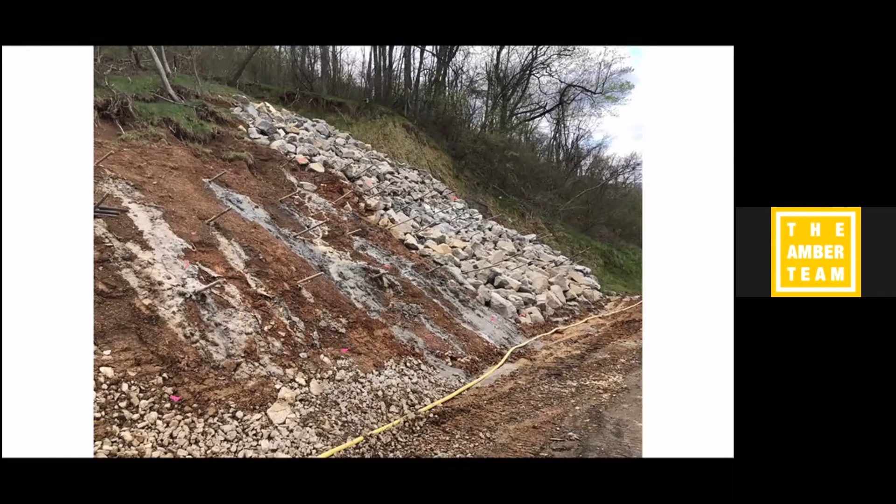All right, so we here at Amber Book, we work in a place that's pretty remote, but at least those who are not remote. Tyler works from Raleigh, which is obviously not remote, but Amber Book World headquarters is in the tiny town, little hamlet of Blacksburg, Virginia. And what we lack in great restaurants or direct flights, we certainly make up for in scenic beauty.

So as a group, we go every once in a while. In fact, we just went today on a hike or a run. About 2 weeks ago, we were going for a run, and you can see what's happening here, right? Or maybe you can't. What the hell is happening here?

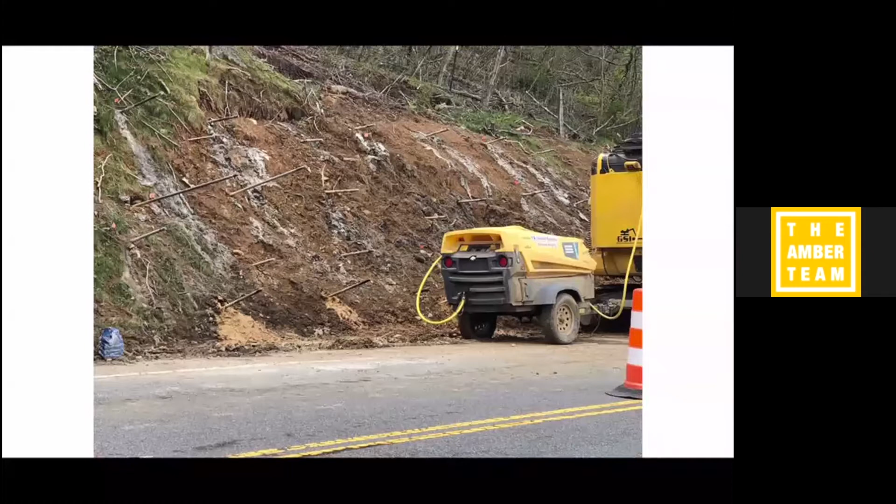What are all these sticks coming out of the ground? They're kind of like metal sticks, and there's this gray drool coming down. And here it is from the other side. Again, you see the metal sticks and the gray drool, and then there's some equipment maybe putting more sticks in the ground. You see them here, and you see them here.

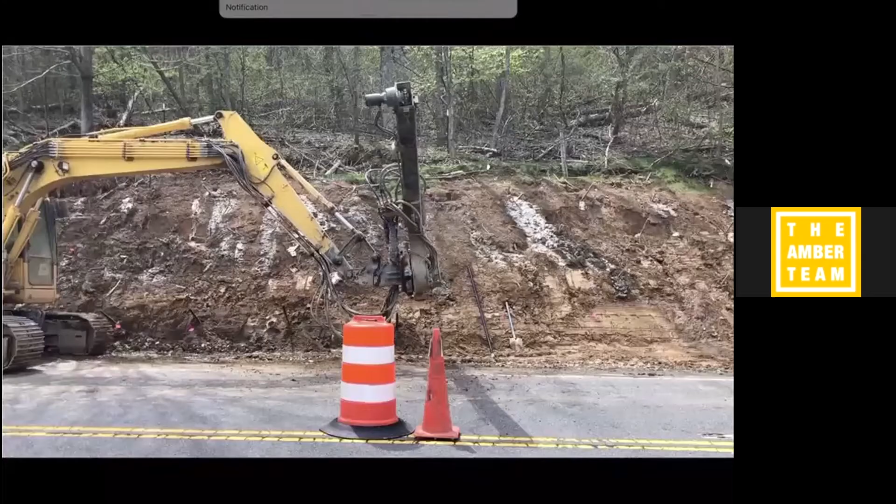So the question is, what's going on? What's going on is this is a big project to limit the amount of erosion that's happening on this hillside that's adjacent to the road.

So I did what I always do, which is just go park the car and get out and start videotaping or photographing workmen at construction sites, which they don't always love, but they almost always love, actually. I found it a truism that people love to talk about their work.

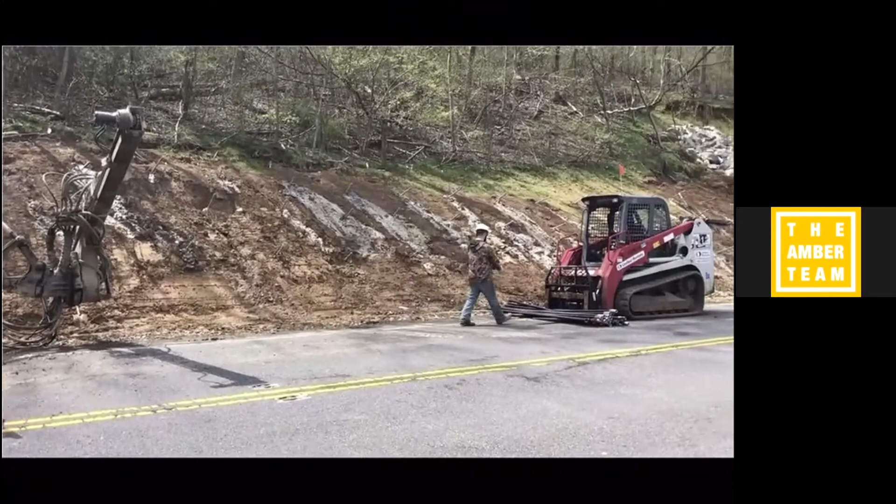No, that's not true. Most people love to talk about their work, and I find it eternally fascinating that there's someone who does this or anything for a living. I can't believe people do stuff for a living. It's amazing. And so you see right there, he's got this right here.

He's got this kind of 4-inch drill bit on a 1.5 inch hollow pipe. So he's sticking it in this machinery. And what it's going to do is kind of pound it into the ground as it spins it. So it's going to drill it into the ground. So it's a hollow pipe.

So if this is the bank of the hill, it's a hollow pipe, and they're going to drill it down. It's hollow, and then it's got an oversized bit on the front of it. So they're going to open up a hole that's meaningfully bigger than the 1.5 inch pipe. The pipe is about the size of a railing, the diameter of a railing.

And you see right here, it's driving it into the ground. You can see right here, it's kind of pushing it into the ground. I had to butter them up for a little bit first before I got permission to cross the street and go kind of behind their cones. You'll see that in a minute. You won't see me buttering them up, but you'll see this from the other angle.

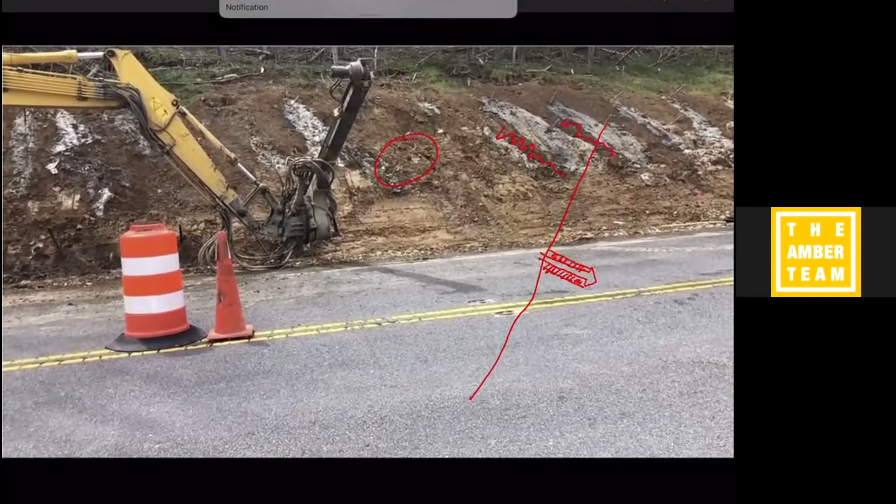So what you're going to see in a second is this is going to kind of pull back up. This little device is going to reverse it. And when it reverses it, it's going to pull some of the soil out. But it won't, importantly, be pulling the soil that's inside the hollow pipe, just the soil that's in the hole around the hollow pipe. We'll talk about that in a minute also.

And then it's going to go back down again. So it's pulling the soil out, just like when you sometimes drill, you'll pull the drill bit out and the sawdust will come out. Now, that was just one maybe 6 or 8 foot long pipe. But you're going to see in a second, he's going to add a second pipe. And I'm not going to show you the whole video, but he adds a third and a fourth and a fifth and so forth. So it's going in and out, in and out.

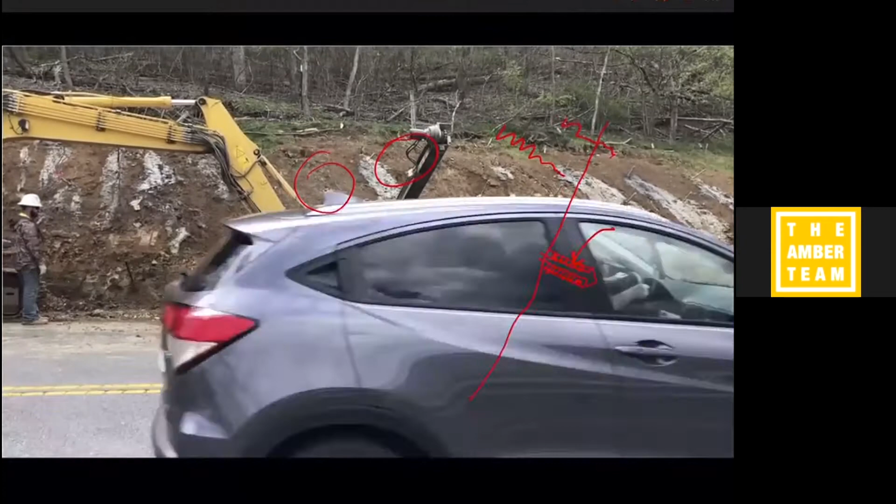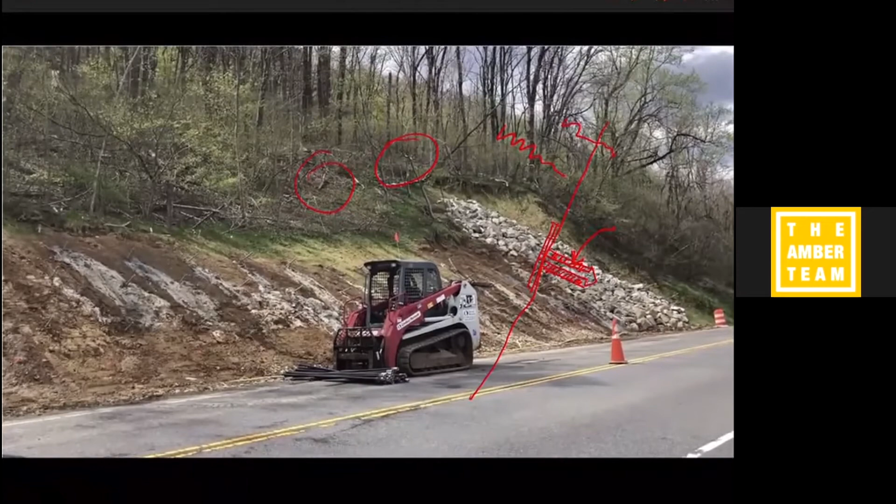And someone asked, is this similar to a tieback? And the answer is hell yeah, it's exactly similar to a tieback. We're going to see a tieback example in a little bit, but in the case of a tieback, we're going to attach it to some kind of a piece of wood or metal that's going to hold the earth back, often as part of construction for a retaining wall, but also construction for a temporary way to hold back the earth when you're digging a foundation.

Let's take a look at one of the others. All right, what's happening here? This is so cool. What the hell is happening here? Well, to the left, do you see all that dust come out? You'll see it again in a little bit. There it goes.

To the left of the equipment, to the left of the backhoe, there's an air compressor, and that air compressor is pushing air into the hollow pipe, and that's how we clear the soil out of the hollow pipe.

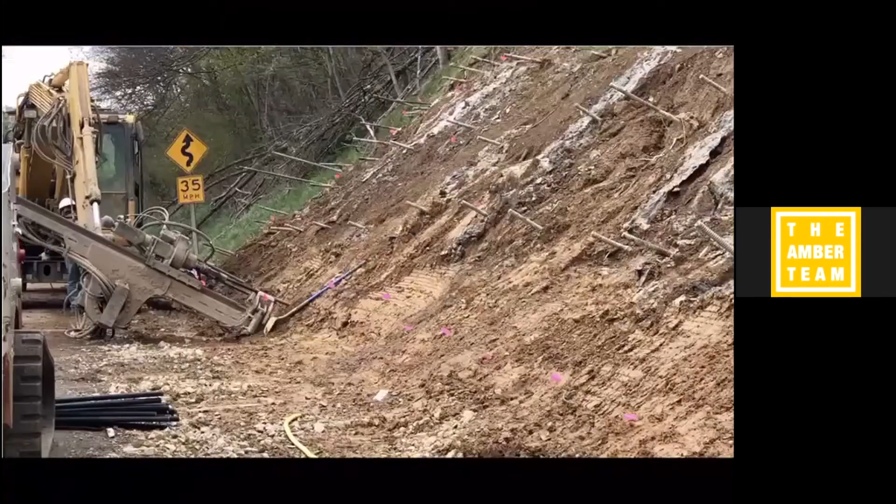Well, how do you push it into one and it happens to pop out the other? That's exactly what happens. So you put the compressed air into the first pipe, and that air then blows the soil that was in these hollow pipes.

You're going to see it happen again, and it's going to blow the air. Here we're pulling out some of the soil, but it's going to blow. You see the dust over here? It's going to blow the air into the hollow pipe and kick out the soil that's in the hollow pipe, and then...

There are seams, or like little pockets of vacant areas, underneath the rock, underneath the soil. Here he goes putting on the next one in the series. So they're going to push these down 30 to 40 feet, and that way they can get enough friction against the soil.

But anyhow, they're going to push it in, and they're going to blow the air through the hollow pipe, and then the soil from pipe A is going to pop out one of the other pipes. You never know which one. It's often one next to it, which is the case here.

But sometimes I asked him, does sometimes the air, does sometimes soil blow out up on the hillside? He said, sometimes. So sometimes they'll blow air down here, and then way up here on the upper right, or somewhere else, some random place, the soil will pop out.

So here it goes in again. And then what they're going to do is, so you have this hillside, you have this 30 to 40 feet down kind of pipe. You have this hollow area around it because the tip of the pipe has a 4-inch bit, but the rest of the pipe is only about 1.5 inches.

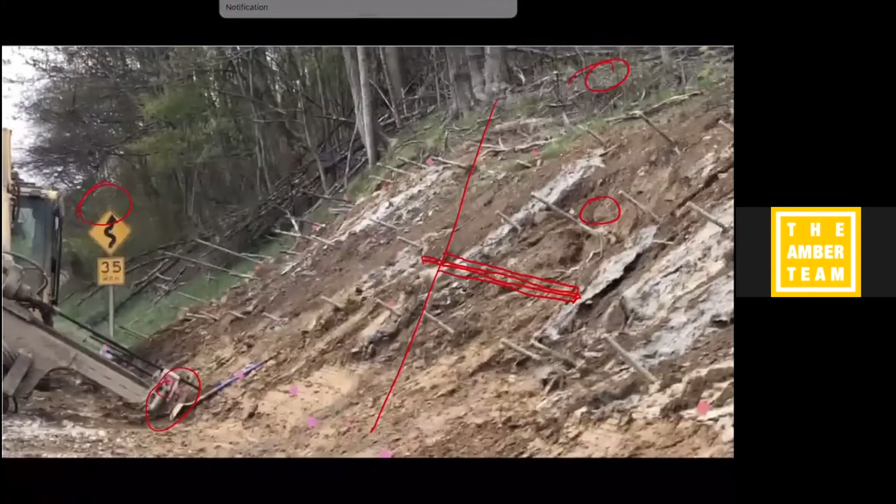Yeah, there's no aggregate in the grout. And so the consistency of the concrete is something close to peanut butter. Concrete's actually a lot more of a solid than you think it would be. And grout is much more the consistency of a milkshake.

So later on they're going to pump grout that's going to fill in this area all the way around on both sides of the hollow pipe, and then some of it, of course, will spill down the hillside, and so forth.

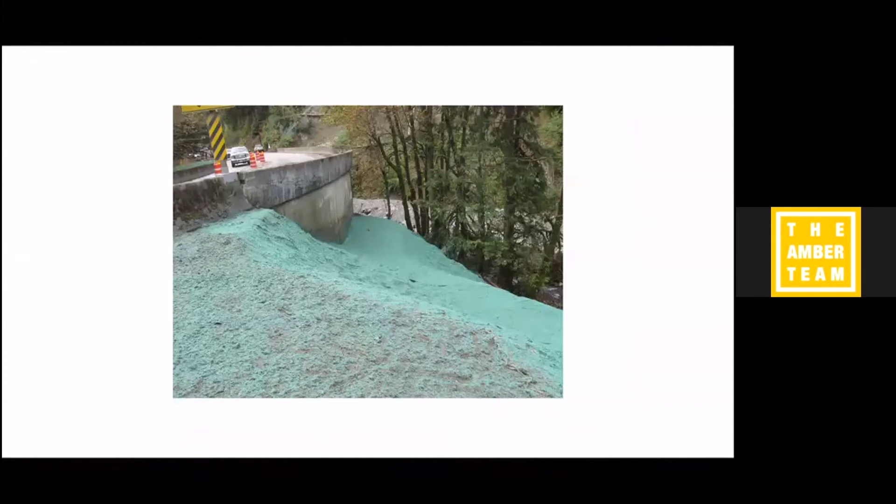So in the end, what they're going to do is they're going to take a net, and they're going to use those basically earth nails, these tiebacks. They're going to use them with the grout. They're going to use them to hold down the net, and then they're going to hydroseed, which is the same as hydromulching. There's two different words that mean the same thing.

And you've seen this sometimes. It's always this kind of weird blue. They spray it on the hillside. It's a combination of seeding with water for the seeds to start growing, and a bunch of chemicals to kind of fertilize whatever plants or vegetation they're putting on the hillside. It's typically a hillside, not always.

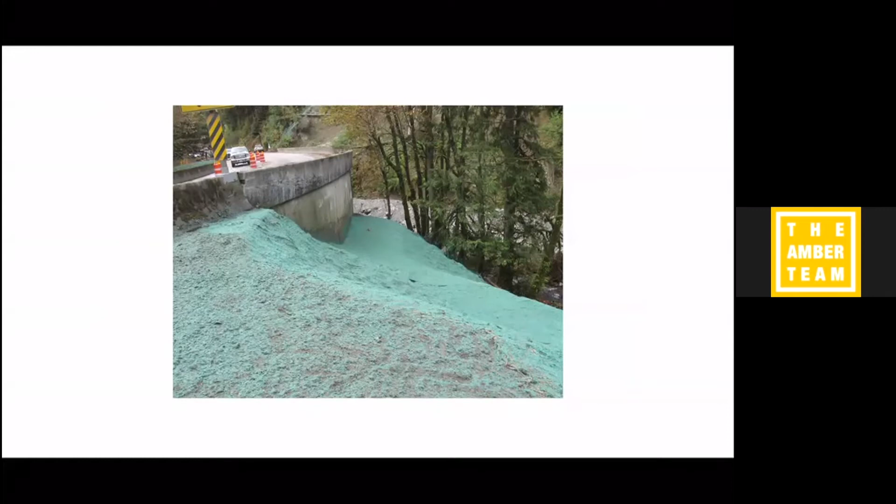And you can't put it on when it's going to rain in the next 24 hours. But other than that, there's not a whole lot of rules to it. You just kind of spray it on in the right amount, and here it is being sprayed on. And so eventually they're going to get vegetation on that hillside, on that bank.

And I cannot stress enough that is the goal. Always, best practice is always to get vegetation when you're dealing with erosion. We haven't out-industrialized Mother Nature in this one area.

So our question here is, riparian zones should be blank. Built on to maximize views and southern exposure? Oh, no. Drained to limit flooding? No. Planted with trees to limit erosion? Yes.

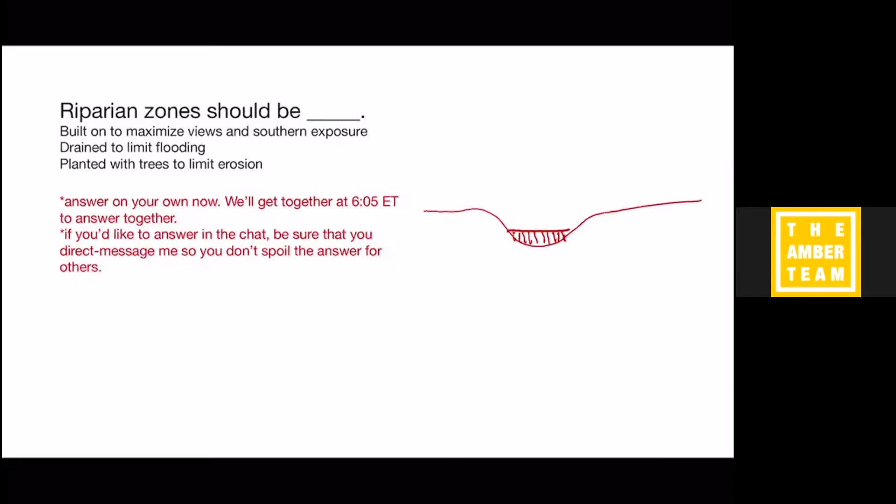And that's what this particular 40 minutes of competence session is about. Now, what's a riparian zone? Well, in section, if this is our stream bed, and here's our water level in the stream bed, it may be that low when it hasn't rained for a week or two, but when it just had a heavy rain, it may get up to here.

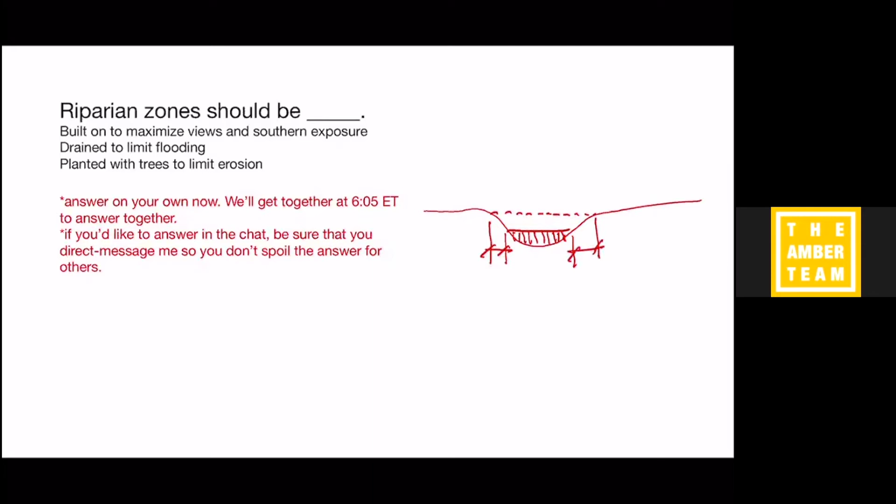So the riparian zone is this area in plan that's kind of wet when there's been a heavy rain, but maybe not wet when there hasn't been a heavy rain in a while. It's not really the flood zone, because it's not really part of the flooding process, although there's certainly a lot of overlap. It's the area that sometimes gets wet and sometimes doesn't, and it's really ripe for erosion.

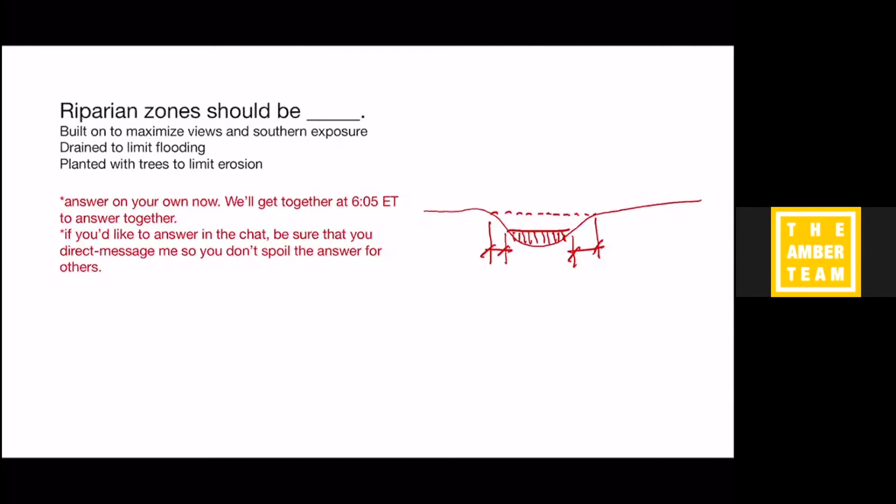And erosion is kind of a big deal. So why is erosion a big deal? Well, because we paved everything. What I'm going to do is start from where the rain hits the ground and work outward from there. We paved everything, and we made it so the water can't seep into the ground.

When water seeps slowly into the ground in a distributed way, that's better for stormwater runoff in terms of quantity—how much water is rushing to the stream and likely to cause erosion, removal of topsoil, and flooding—but also for the quality of stormwater, because the soil does a pretty good job of filtering out the pollutants we don't want as the water goes and replenishes the aquifer underground.

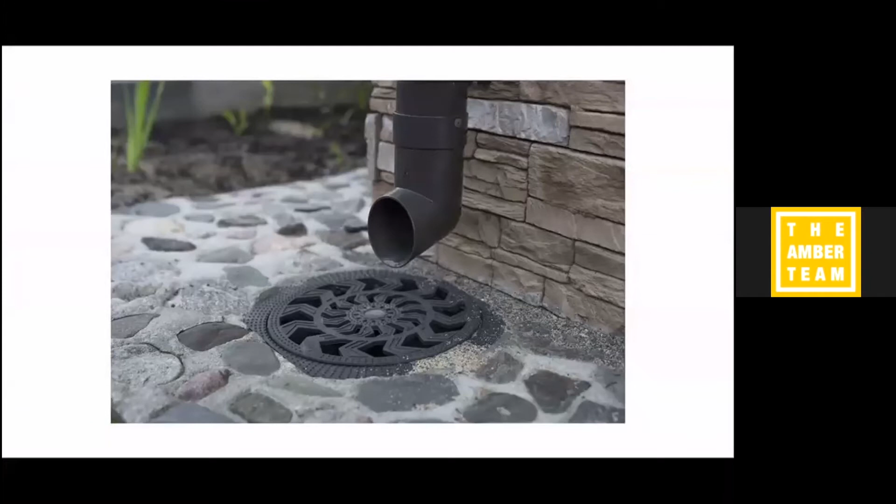The old thinking was: pave everything, put a bunch of gutters to a bunch of drains, and then take that water and get it away from the building. And yeah, that makes sense from the building's point of view.

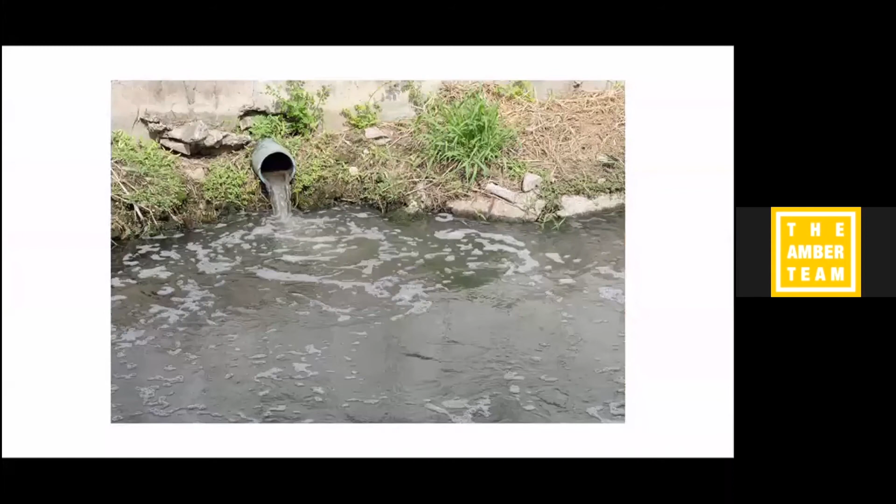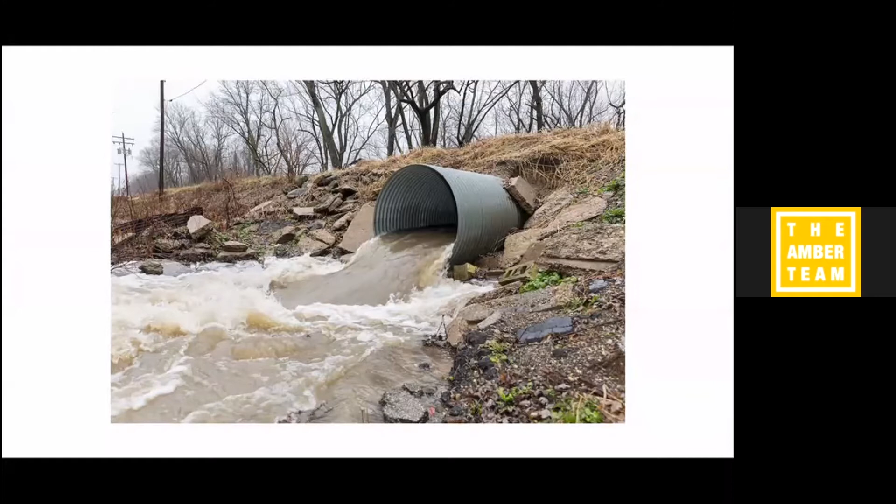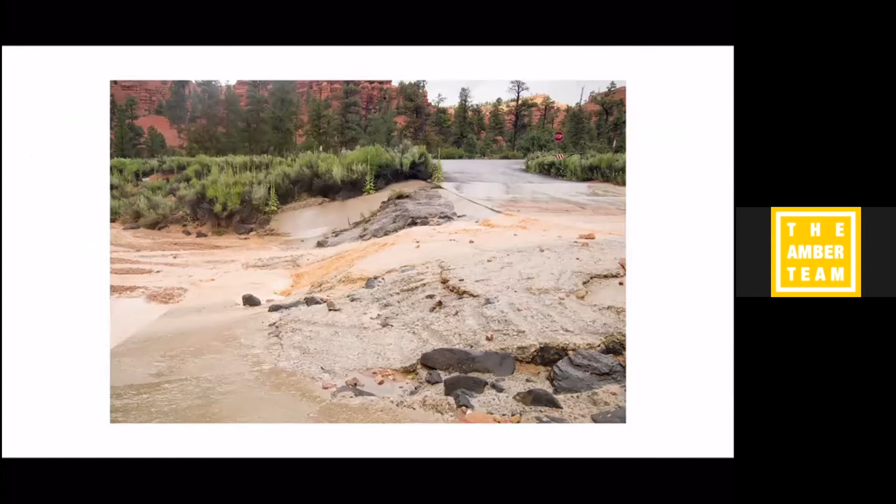But the problem is, if everyone does that, we have a tragedy of the commons, because the water rushes into the streams and takes away topsoil, and topsoil is really precious. It causes erosion in the streams and flooding, with all the bad things that come with flooding—life safety concerns, property damage, and the washing away of topsoil, which takes something like 1,000 years per inch to replenish. Topsoil is super, super valuable.

So one approach is to pave less. If you have a shopping center, you convince your client they don't have to pave to the maximum likely number of cars that will come on Black Friday. They can pave for the cars that are there almost all the time, and have an overflow lot that's gravel or something that lets water through. Every once in a while there's a problem if it snows on Black Friday, since it's hard to clear snow from a gravel lot, but in general it won't be a big problem.

Now, the thing that probably gets the most press, because it's pretty sexy, is a green roof. But green roofs aren't that exciting from an erosion point of view, because you generally want to get water off the roof just for the building's sake anyway. There's no reason you have to take the water from the roof and put it directly into the stream. There are lots of ways to hold it before releasing it slowly into the stream or into the ground—that can happen adjacent to the building or elsewhere on the site. It doesn't have to happen on the green roof.

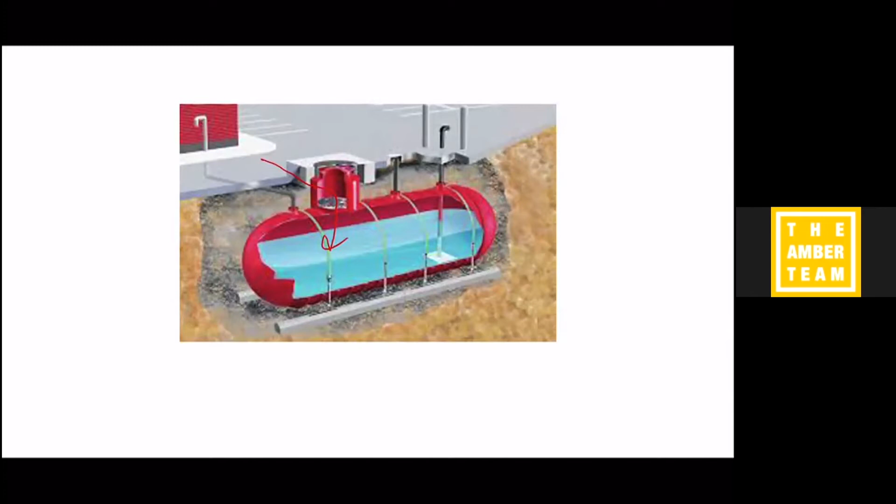Another way to do it, which we do often with parking lots but also with buildings, is to submerge a tank. In the lowest part of the parking lot, there'll be a drain, and the water just goes into the tank. If you're asked where to put a drain, in a parking lot or anywhere, you want to put it on the lowest part, because that's where the water wants to go anyway.

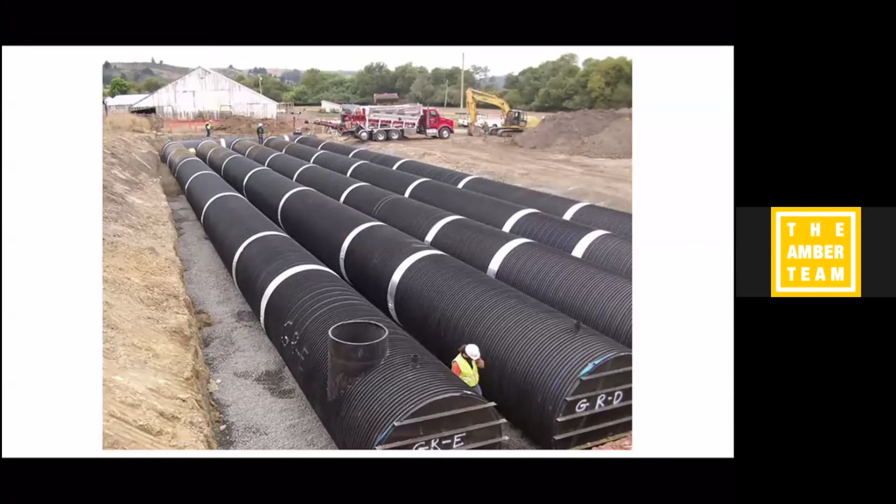So these tanks sit underground. Sometimes they'll take a bunch of big pipes and put them together, and that becomes the tank. Then they'll cover this up, so all the water eventually goes to this and it fills in. There's a connection somewhere in here, or here it is in the back end. There are connections, and we don't keep this water forever.

We just let it out very slowly into the stream, so as to not cause flooding or erosion. In many ways, this kind of stormwater management is the tail that wags the dog right now, because we collectively ignored it for so long. Maybe 20, 30 years ago, we started saying, whoa, we can't just do this. Municipalities went way the other direction and started making a stormwater management plan a feature or prerequisite to almost any kind of development.

So if we have bare earth, we want to hold it back while we're waiting for the plants to grow, because we always want plants to grow if they can. That is by far the best practice. There's just no topping it.

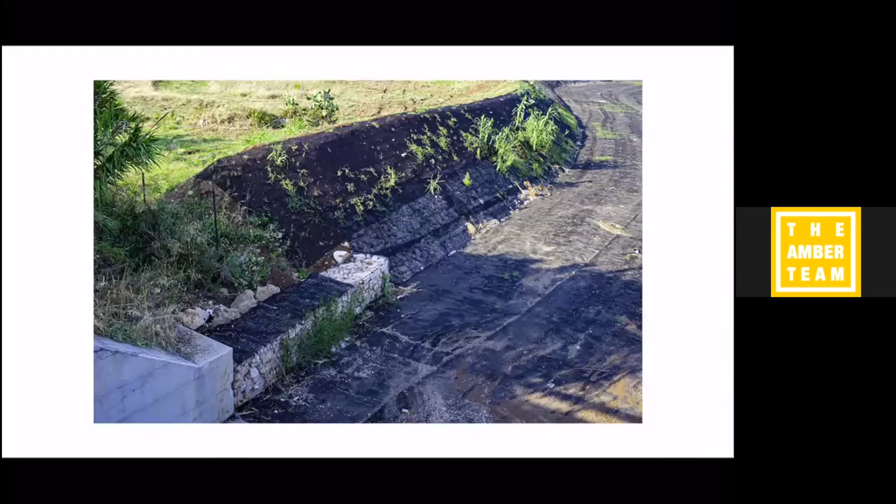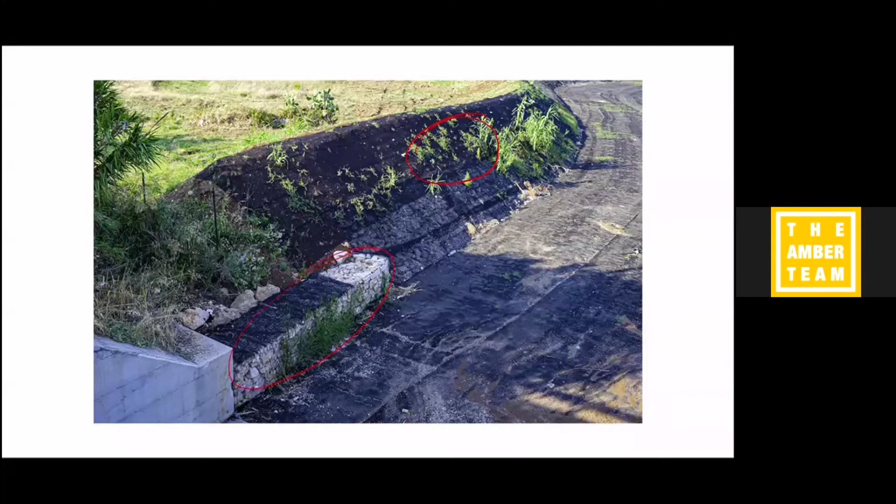So you have these geotextiles. This is kind of an open mesh, you see. There's a netting in here, and you can see the plants are coming in. You can also see a gabion wall forming here as a retaining wall. Here's another kind of mesh, I think similar to the one they were going to put on the embankment that I showed you at the beginning.

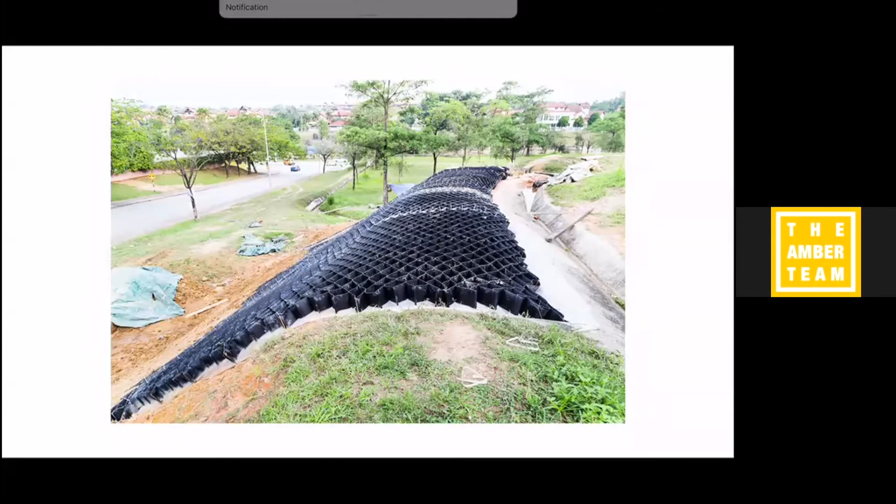Here's another geotextile that comes kind of flat, and you open it up, and then you can fill it with soil, and then fill the soil with seeds, and eventually you get hopefully an active vegetated berm. Here it is again, and this is a different, more dense geotextile.

There's just an amazing number of choices. I went to Lowe's day before yesterday and bought some geotextiles for some planting I'm doing, and I didn't know which one to get. I teach this stuff, and there are so many different choices that I wasn't even sure which one to get. But there's tons of choices.

Here are some more, and basically some are kind of open netting, as you saw, and some are biodegradable, and some are more kind of quasi-permanent. Some keep weeds out. Most of them, almost all of them I think, let water through. Some let plants grow through, and so forth.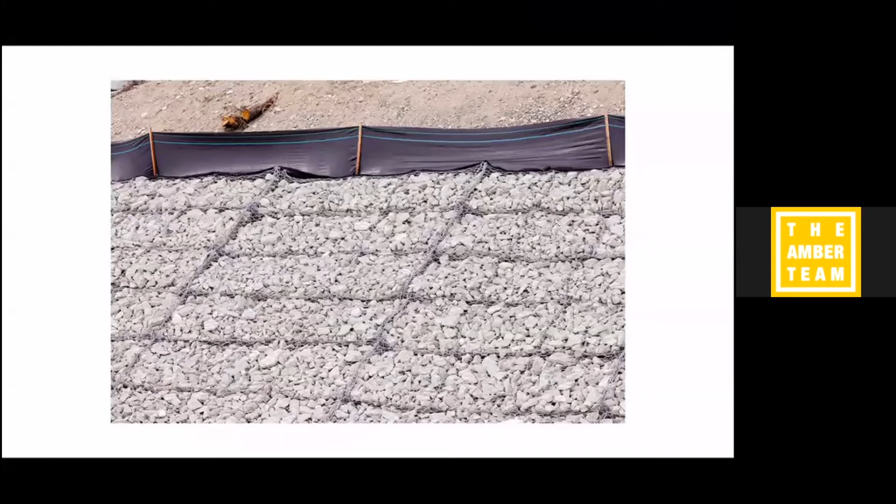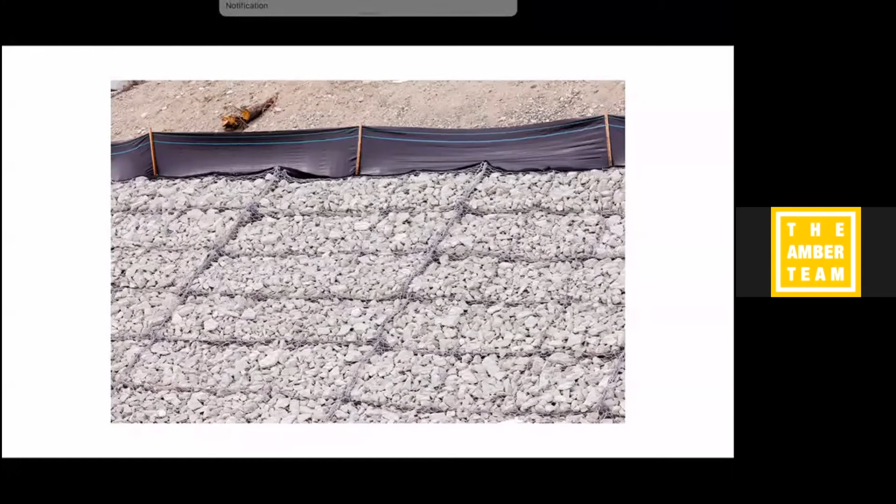Our first goal is to limit erosion, and erosion is just what you think: the wearing away of the soil from wind and from rain. But our second goal after that is what's called sediment control. So we have erosion control, and we have sediment control. They're related, but sediment control is all about, okay, there was erosion, now we want to make sure we keep that topsoil on the site.

We don't want to put it in the stream, because A, we need it on the site for future plantings, and B, when we send all that topsoil to the stream, it really messes up the ecosystem of the stream, which is never made to be that cloudy.

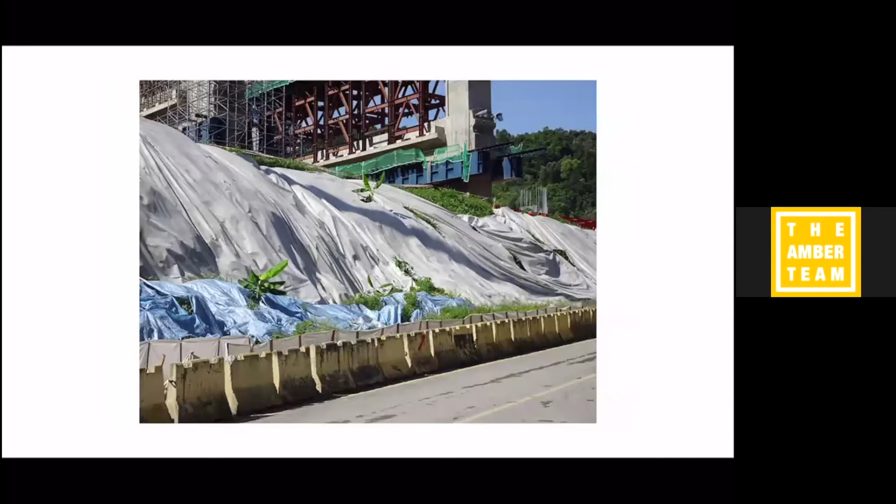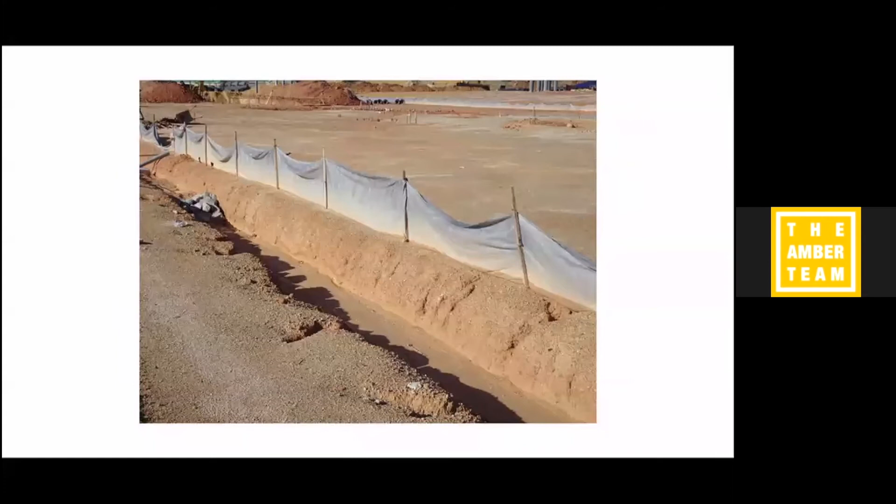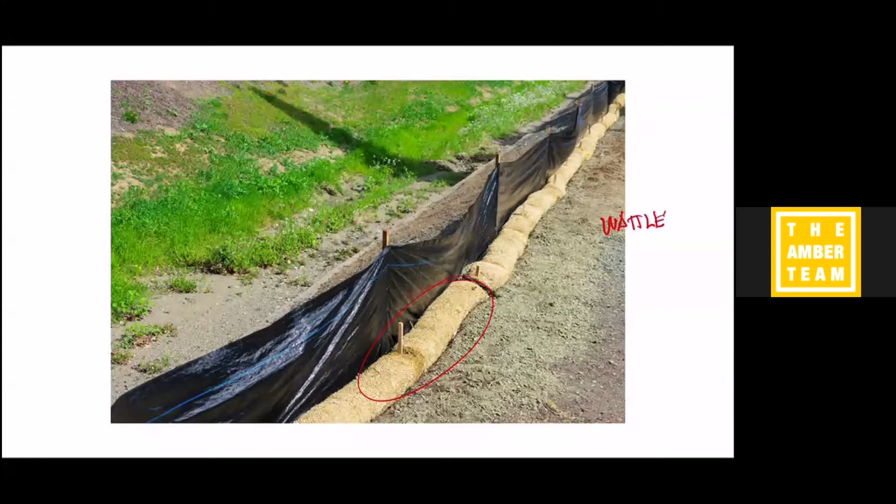But again, if it gets out, we have silt fencing, more silt fencing, and more of these things. You've seen them everywhere, especially lately on construction sites. Those are called wattles, W-A-T-T-L-E-S. They're sometimes made from straw, and sometimes called erosion control logs or erosion control rolls.

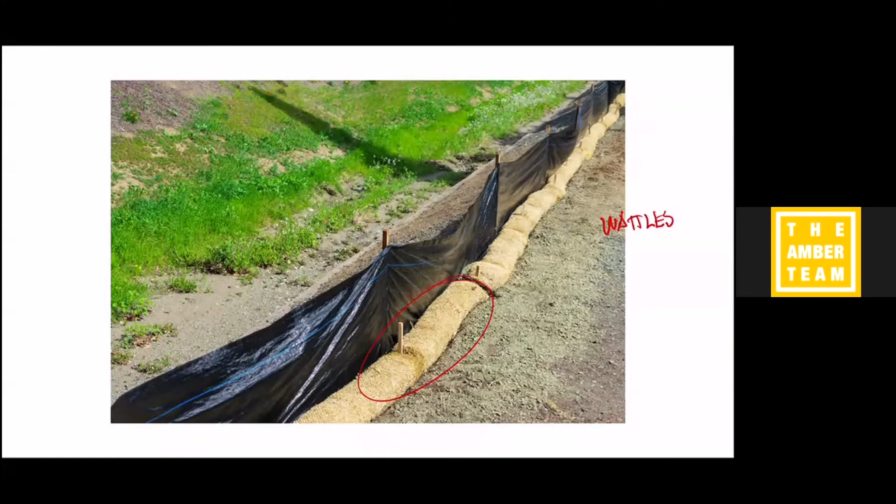Those names are probably easier to remember. As far as I know, wattles aren't really important for you to know for the exam, but I thought you might want to know what they were. And they do exactly what you think: they let the water through, but they keep the

soil out of the drains, or out of moving downstream, keeping them from taking away the topsoil—the twin evils of stripping the site of topsoil and clouding up the water when it's not made to be that cloudy.

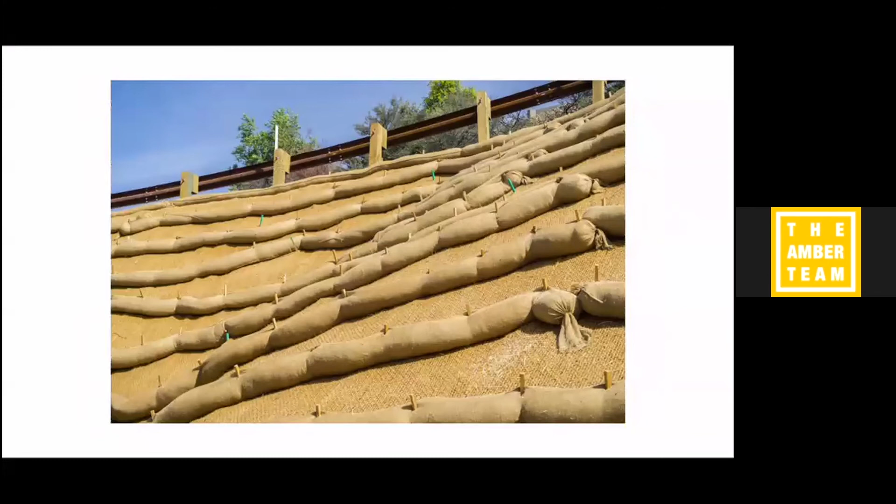Sometimes they're coconut husks, and sometimes we have lots of them, sometimes we have a few. These are coconut, or wattles, used as check dams. So as the water moves down in a heavy rain, they're slowing it down. Not only are they trapping the sediment, but they're slowing down the water, so there'll be less erosion.

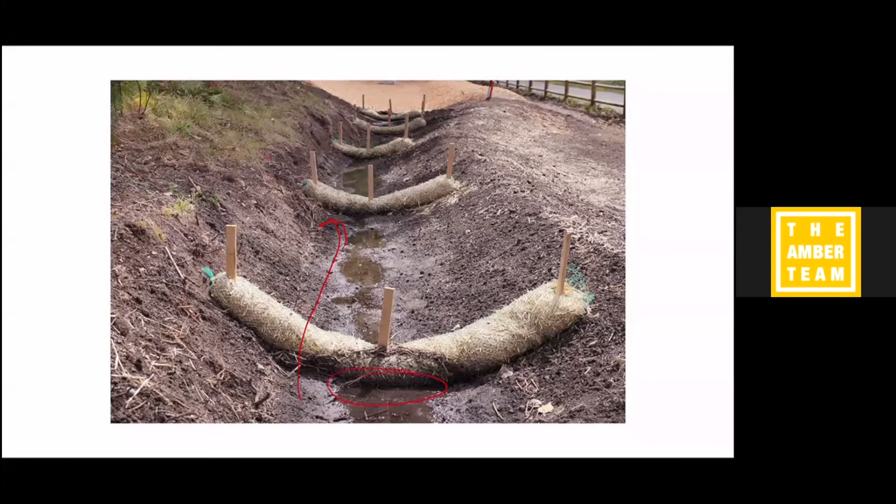And here you have check dams, and this is important for the exam, this phrase: check dam.

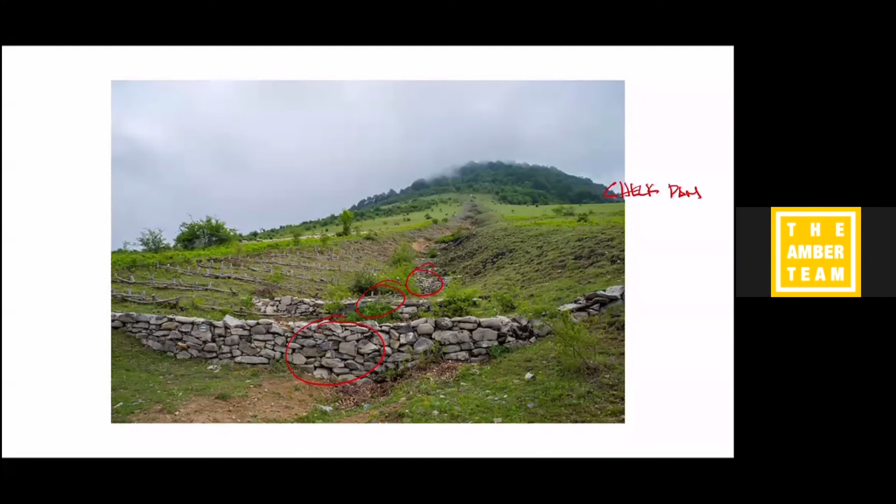And it's just a way to slow down the water as it moves down the hill.

Someone asked if these were similar to tiebacks. Yeah, usually tiebacks are in the discussion of retaining walls, either temporary for construction or permanent, and it's the same principle. We've basically stuck a nail in the ground, drilled a hole that was too big for it, blew out all the dirt, and then filled it with grout so we'd have enough contact with the soil and earth, so that with friction we make sure the whole wall doesn't topple over. There's a whole other discussion, and maybe we'll do a future 40 minutes of competence on just how to keep back the earth during construction. That's really fascinating - also how do we keep the earth back so we can dig a foundation, a basement. But that's probably a different conversation than we're having today.

Today we're talking about erosion. So this is what we don't want to see. This is bad, bad, bad. And if you see this, you should be thinking, oh my God, gold is leaving.

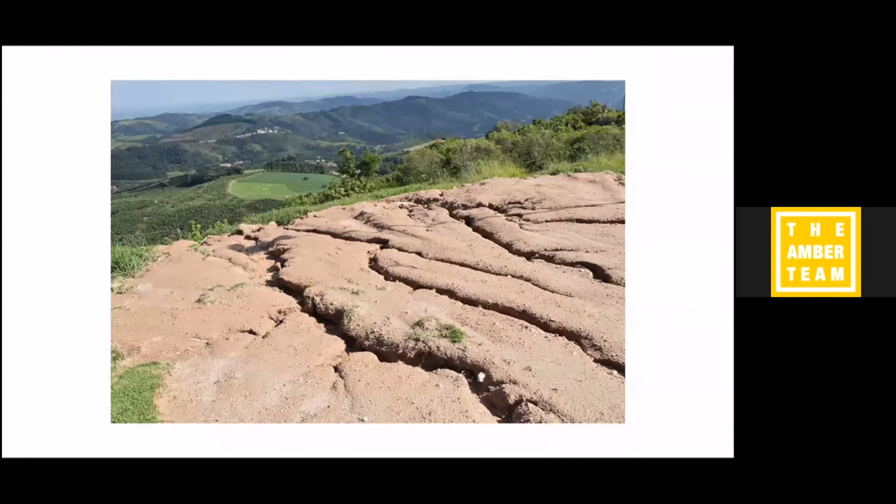I used to work for a design build landscape architect when I was in high school, and he taught me - I just took this picture less than an hour ago. I'm that guy who goes through his lawn and digs out the dandelions this time of year. When I dig them out, you can see there's almost no topsoil, because I dug out the roots pretty carefully, but there's almost no topsoil. The landscape architect I worked for in Wilmington, Delaware in the 90s - we would do 2 or 3 days in the office and 2 or 3 days out in the field, and when we were in the field he did not like to waste topsoil. Now I understand why. I've developed that habit where whenever I dig out a weed or something, or if I'm stripping the ground for plant matter, I take my fingers and rub the soil together and put the topsoil back on the lawn or the yard or the site, because I don't want to throw it away in the trash. So these are things we don't want.

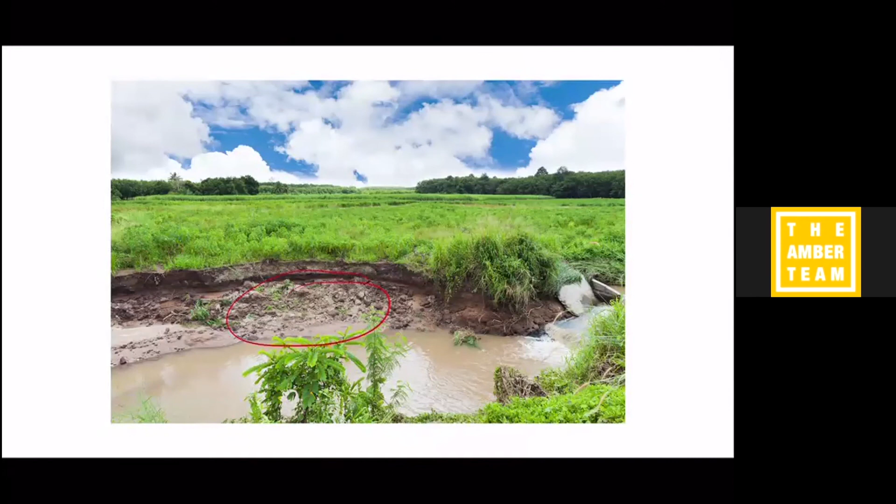So here's the area - this is riparian, right? It's probably the area between here and here would be the riparian. Again, grass is good if we have to, like in a desert situation like this. But even with grass, we still have erosion, and sometimes lots of erosion when we have grass or other less robust root systems. So we don't want those.

Actually, in the Northeast, what's really good for water quality, because it filters it, is oysters. So we're starting to replant oyster beds all around. If you want to look up oysters in New York City - if you're from New York, if you're living in New York, if you've ever lived in New York, or if you're just curious, Google oysters in New York City. The amount of oysters consumed by people in New York City in the 1800s is insane, but there were oysters everywhere. Something like 1 out of every 5 oysters eaten in the world were eaten in New York City during that time, because the entire New York City area - the East River, the Harlem River, Hudson River and so forth - were just full of oysters.